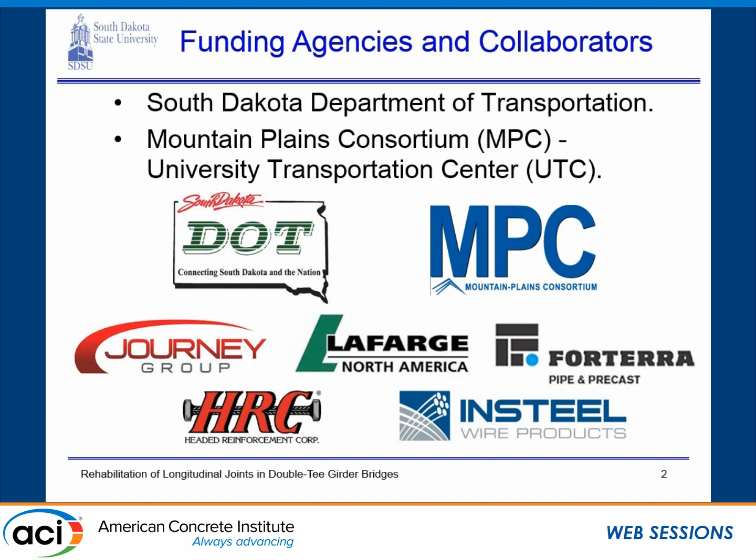Another good news that I have for you, I'm the first person in the seismic presentation who is not going to show you anything regarding seismic. But this is one of the issues that you would see in many of the bridges.

I'm going to talk about double T bridges and how we are going to retrofit the longitudinal joints of 2 precast girders. Just to give you an introduction, double T bridge, we can see the section down there - here is around 4 feet wide and 2 feet deep.

The way that they're constructed is they just put them side by side. There are steel angles every 5 feet along the length of the girders, and on field they just weld another small plate to the existing angles, and they fill the key with the grout. That's essentially how a precast pre-tension double T bridge is constructed.

That's fairly common in South Dakota on the local roads. We have more than 700 of those. And I know that many of the neighboring states have this kind of bridge. In parking buildings, you can see also this kind of girders. And I know that Texas and Alaska also use this.

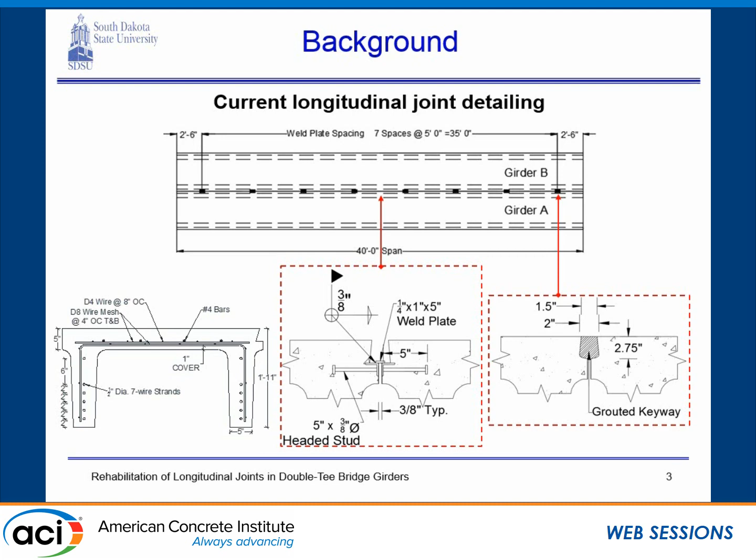So the issue that I'm going to raise today, and hopefully to give you some answers, is not just for South Dakota, you would see in many other states. The issue is both structural performance and durability and serviceability.

After 5 to 10 years of service on the field, what happens is the joint deteriorates, because of the salt used for the snow, and the deterioration of this joint is faster than what you would see, let's say, in California. Basically, after 40 years of service, DOT ends up replacing these girders while they should last at least 75 years. So that's not the case. That's actually the durability issue.

Dr. Wehbe, who was the co-PI of this project, also did a full-scale test of this bridge, 40 feet long, 2 of the girders side by side. He used the conventional detailing that I showed you, and he tested the girders to failure. You can see that the bridge unzipped, and essentially you have 2 girders that don't talk to each other, don't transfer loads. So they can meet AASHTO service limit state, but they cannot meet AASHTO strength limit state. So absolutely this design, this joint, after 20, 30 years would make your design unsafe.

So essentially one of the girders is taking the full load of the truck rather than distributing it.

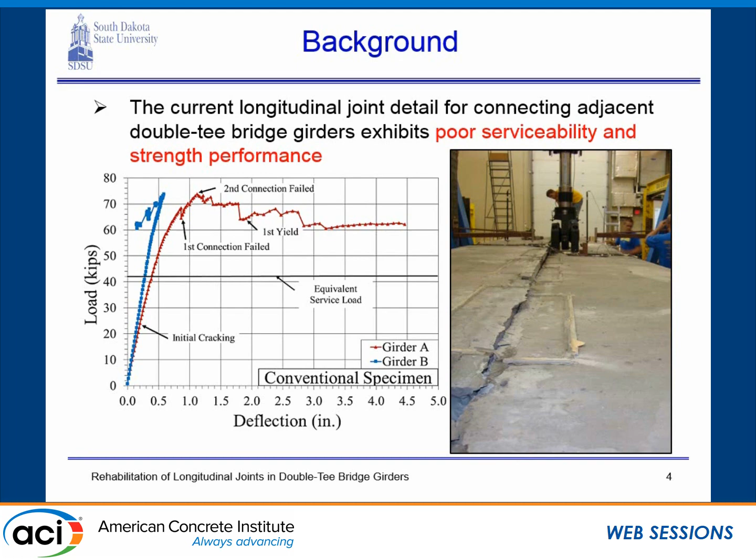So my job here is to show you the technique that we came up with to repair it, the retrofit, and hopefully to extend the life of the bridge for another 75 years rather than replacing them. To be able to do that, I need to introduce latex modified concrete. I don't have any specific slide for that, but I do have one for ultra high performance concrete, which is kind of a hot topic right now.

Here is essentially what UHPC is. It's a cementitious material with very fine aggregate. They make old sands and gravel the size of dust and mix them up to make a honey-like material they pour, and that's UHPC.

2% steel fibers is usually used, and in the lab, the strength can get to 36,000 psi. When you hit it with a hammer, you can hear the sound of steel while it's concrete. On field, you can easily get to 18,000 psi.

Here is a stress-strain diagram of concrete in compression, and that's UHPC: 5 times stronger, 5 times more ductile without any reinforcement, and the tensile property is much better than conventional concrete.

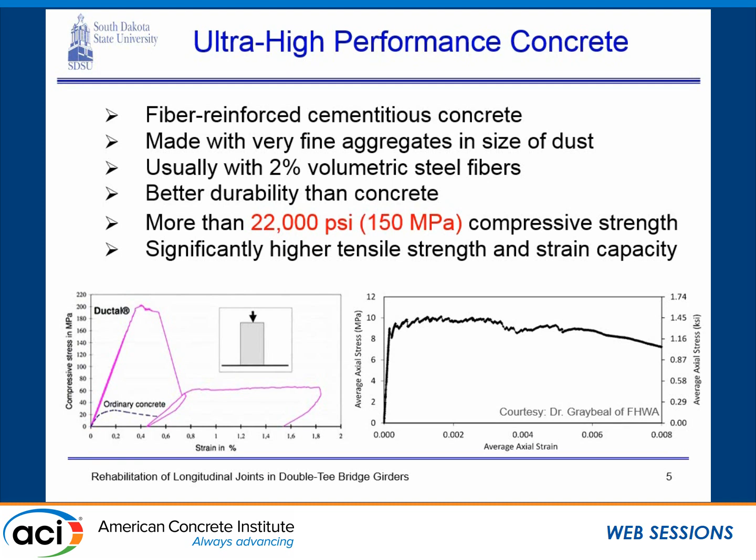So this is one of the materials we use in this study. What we essentially did was an extensive literature review. We came up with 20 joint rehabilitation detailings, then we came up with a rating system. The rating system told us that 4 of those options would be the best for rehabilitation of this kind of bridge.

We did 13 larger scale beam tests to optimize our detailing. We also did finite element analysis to come up with the smallest possible sizes of the repair. Then we tested one full-scale bridge for around 50 years of service life. We basically massaged the bridge and saw some preliminary damage.

Then we did the rehabilitation. We tested the bridge for fatigue and ultimate testing. Because of the interest of time, I'll only show you the result of rehabilitation, how we did the rehabilitation, how the result was, and at the end, the recommendations that we made.

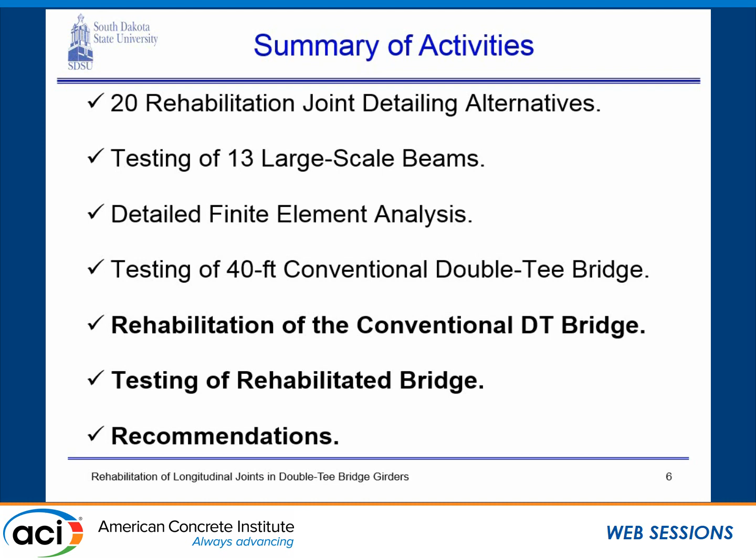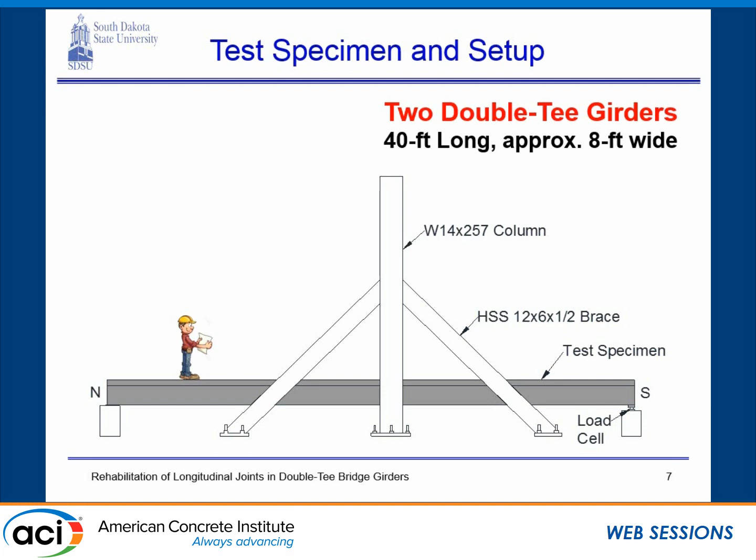We tested a full-scale 40 foot long bridge. The way we built it, we asked a contractor, Forterra, down in Mitchell, South Dakota, to build these 2 girders. We put them side by side, and followed exact detailing that has been used on the field.

We asked a licensed welder to come and do all the steel welding for us. We tried to be as realistic as possible to what would be used on field. We started testing this bridge, massaging it for maybe 40 to 70 years of service life, and then performed rehabilitation. We didn't want to rehabilitate a new bridge, so let's put it that way.

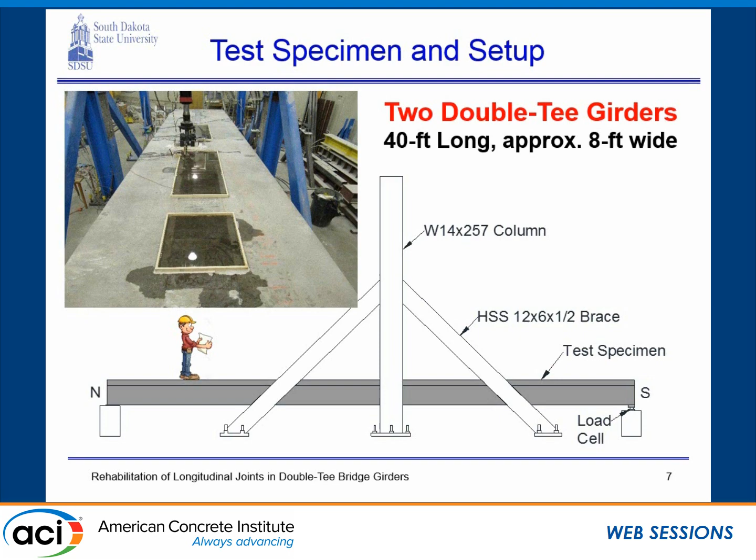We had all kinds of sensors in it. When you stay here, that's what you would see on the bridge, and you can assume that would be me. So that's the geometry of the bridge.

We did 5 tests. We started with testing the conventional bridge, then tested it up to the service limit just to crack the longitudinal joint, and then rehabilitated it, testing under AASHTO fatigue 2 loading for 500,000 cycles, and AASHTO fatigue 1, which is not really the case here.

This bridge is going to be used on local roads, so fatigue 1 really doesn't apply there—that's for high traffic volume areas. But we did it just to make sure the bridge is strong enough with the rehabilitation, and we did ultimate testing as well.

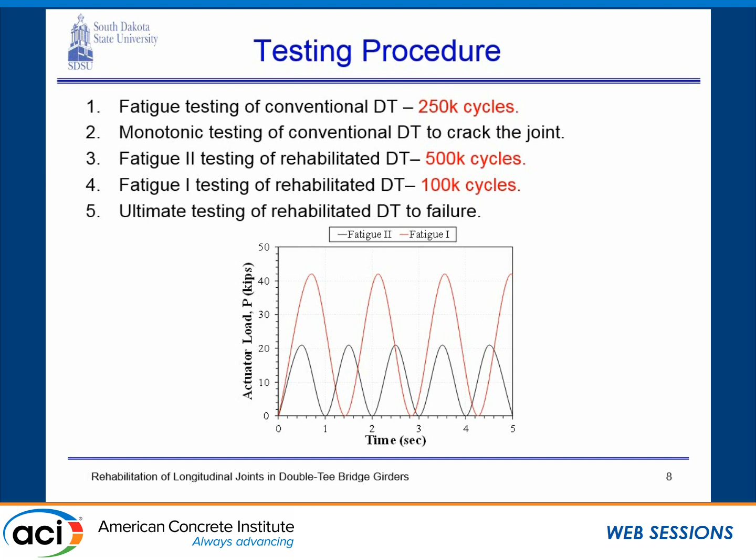The bridge was heavily instrumented with different kinds of instruments: strain gauges, LVDTs, and load cells. To give you a general idea, out of those 5 element tests and 13 beam column tests we did, we came up with 2 rehabilitation methods.

Rather than testing 2 full-scale bridges, we came up with testing 1 full-scale bridge, but using those 2 methods on half of the bridge each. On this half of the bridge, I'm going to call it a continuous joint.

We poured latex modified concrete, and all our previous studies were essentially saying that the durability of this material is good, so that's why we used it instead of conventional grout. On this portion of the bridge, we came up with this pocket idea to reduce material and cost, using ultra high performance concrete, or UHPC, in this one. So this one I'm going to call the pocket connection, and that one is the continuous one.

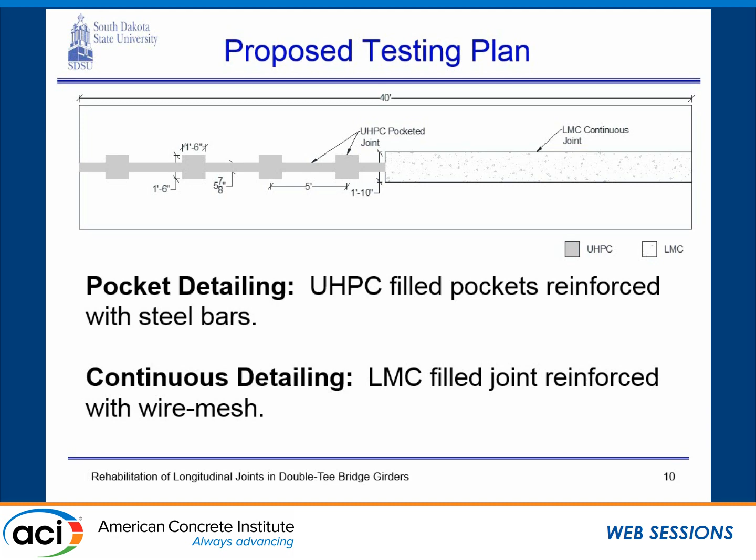The way we performed the rehabilitation after testing the full-scale bridge was we asked a licensed contractor to come to our lab and make those shapes that I just showed. Essentially, they cut 1 inch deep and then demoed the concrete.

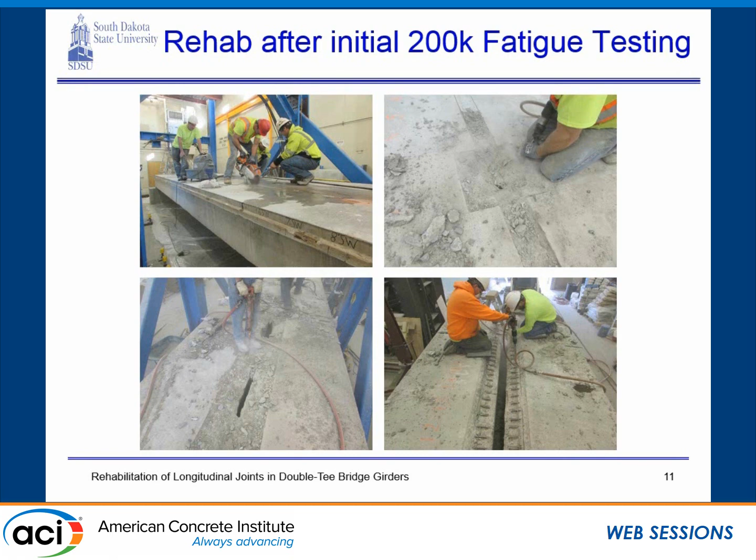The goal was to use exposed bars of the deck in either case and add some reinforcement to make sure we tied the two girders together. All of those previous studies were to optimize the size of the joint, the spacing, which was 5 feet, and the size, 18 by 18, or 22 inches here, continuous one.

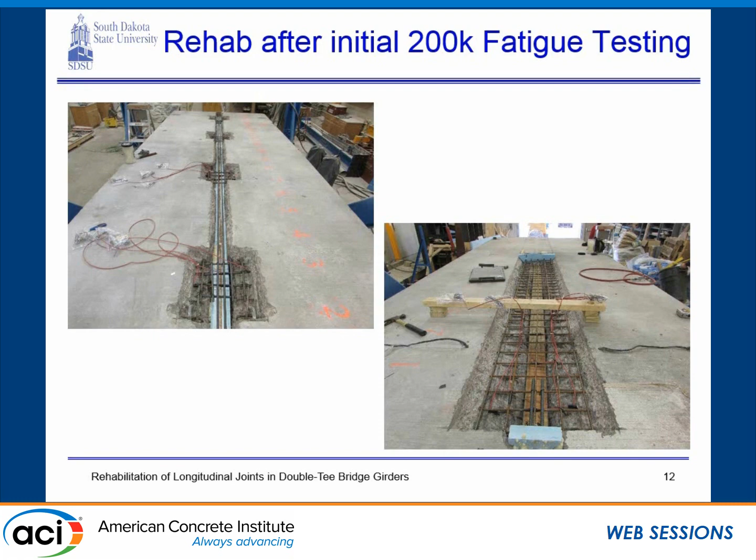So this side we filled with latex modified concrete, and this half of the bridge we filled with ultra high performance concrete. Here we can see how we poured the latex and UHPC on field. That was essentially very easy.

The only issue with UHPC, at least for us, is we didn't have a large volume shear mixer. That was an issue for us, but on field they can go with huge capacity, large capacity shear mixer. That would be the only issue because it needs 20 minutes of mixing, and a more powerful machine would give you that option.

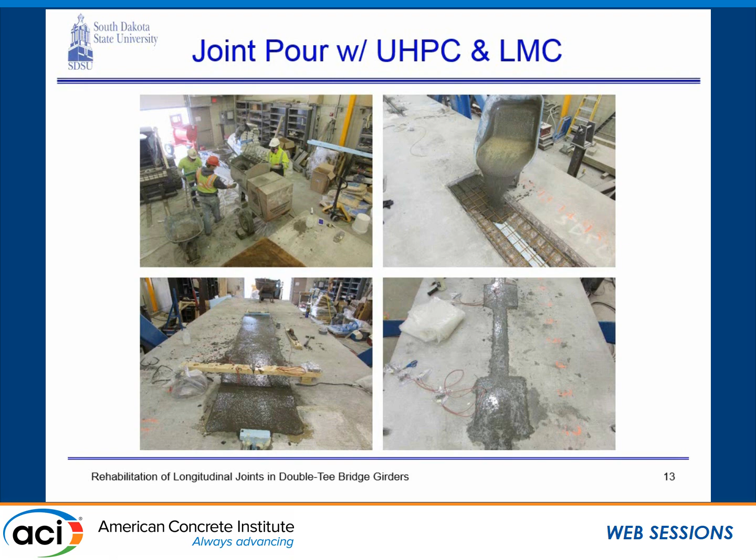Before we did any testing, we saw shrinkage cracking on the latex modified side. Let me zoom in - that was one of the girders, that's another girder, that's the continuous joint we filled with latex modified concrete. And that's just before doing any testing - we saw this parallel, shrinkage-like cracking.

Just by seeing this, our recommendation is don't use latex modified concrete or any kind of conventional grout here, because of the boundary condition you would see a shrinkage crack. They call that a restrained shrinkage crack. So that was a hard way to learn - don't use that material.

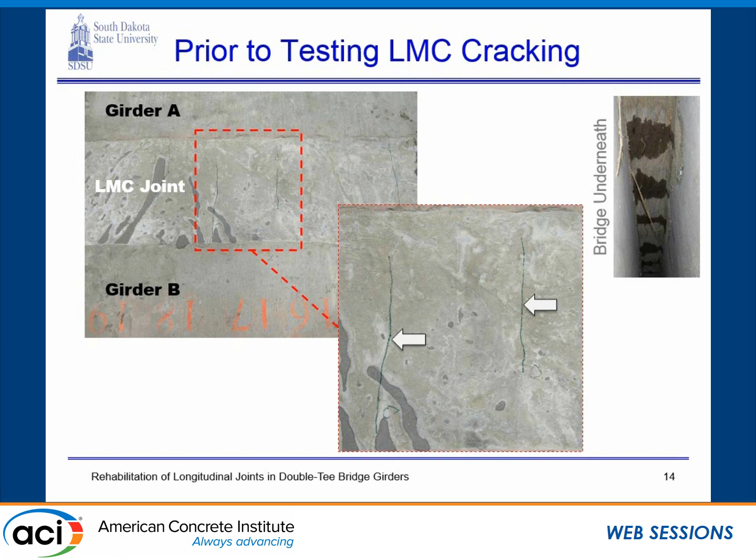But anyway, we decided to continue the testing. This is a picture of the bridge underneath. We had water dams on top of the bridge on every one of these joints, so you can see the water leak - it was pretty bad. If you want to use it in a cold region, this would deteriorate very fast. So it's really not an option for cold areas - our recommendation is don't use it.

This is the way we did our fatigue testing. This one is AASHTO fatigue 2. We apply 21,000 pounds every second.

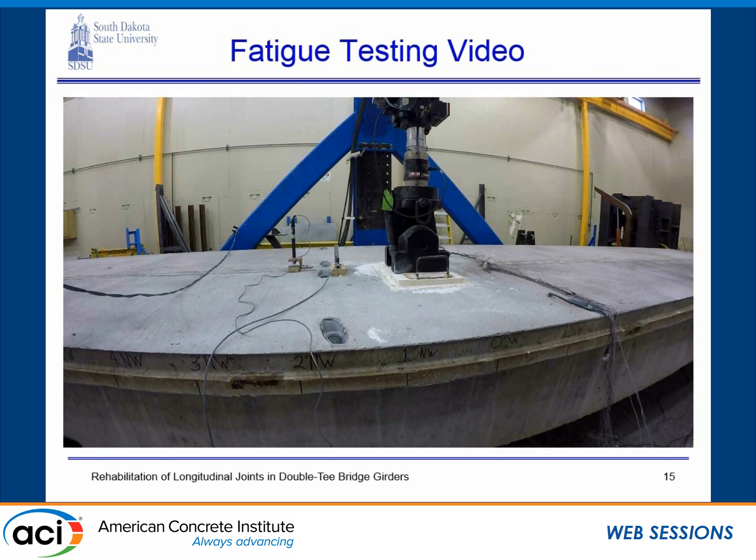Here is the result of both phases of the fatigue testing. This is AASHTO fatigue 2, which is for local load essentially. For 500,000 cycles, based on an average daily truck traffic (ADTT) of 15 - which is actually a good number for South Dakota local roads - it's equivalent to 97 years of service life. For 97 years of service life, the stiffness of the bridge didn't deteriorate at all, and it actually gained some stiffness. It could just be a measurement issue, but you can see there was no change in the stiffness. So we can say that, at least from a service life standpoint, it's good.

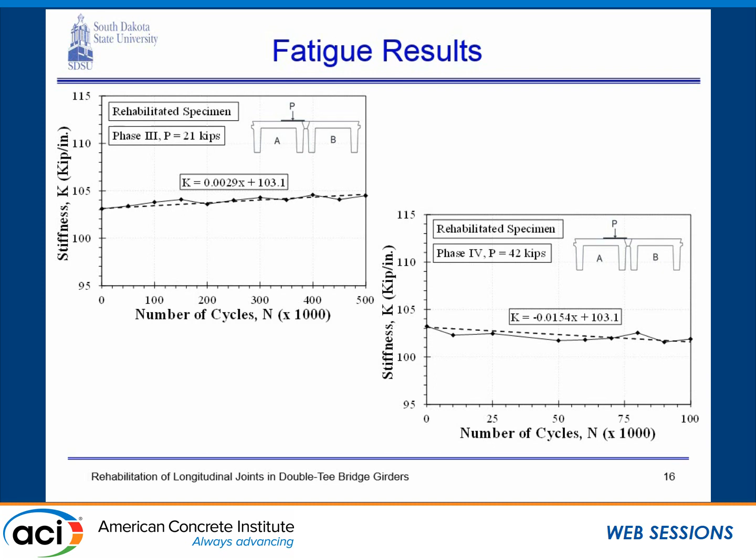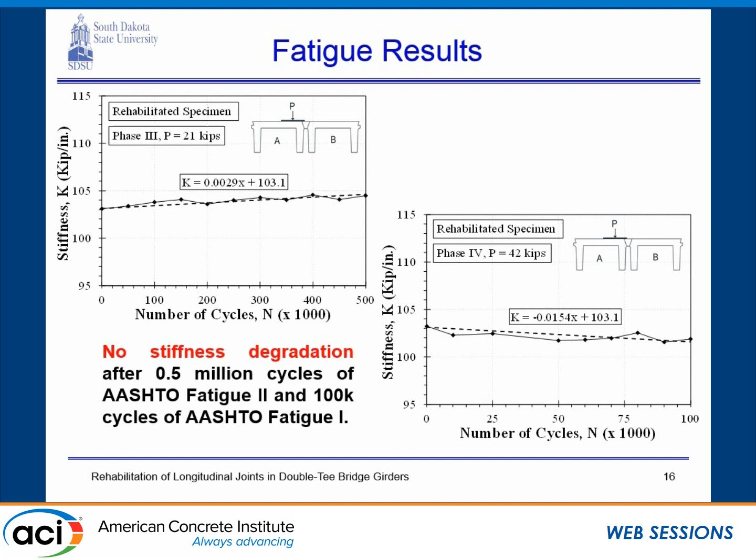We also did AASHTO fatigue 1 testing, which is essentially double the force we applied in fatigue 2. This is for high traffic areas, and again we didn't see any significant change in stiffness. So our conclusion was, even though there was shrinkage cracking on half of the bridge, overall there was no change in stiffness - those shrinkage cracks don't affect structural performance. Combining both tests, we tested the bridge for more than 100 years of service life, and there was no change in the stiffness of the bridge.

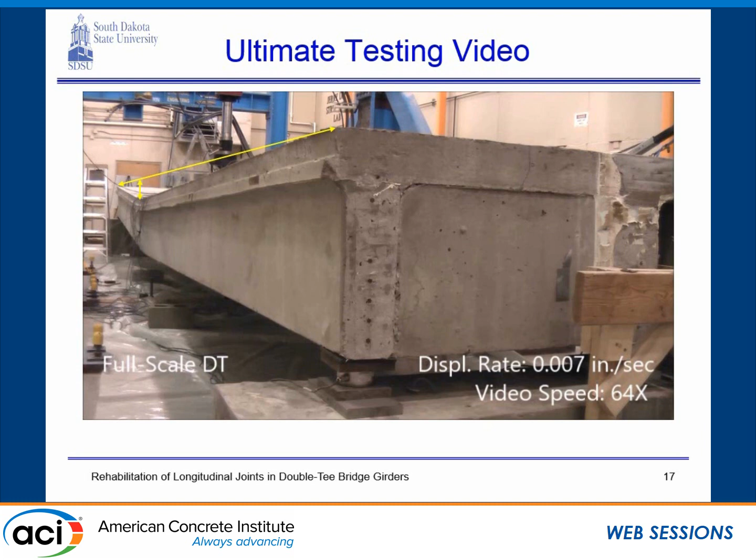Then we performed the ultimate testing. Our speed was very low, and I have these arrows for you to see how ductile the bridge was. The speed of testing was 0.007 inches per second, so we did this testing over about 4 hours. You're seeing that in 30 seconds - the speed of the video is actually 64x. You can see the bridge bending here, and it essentially failed in a very ductile manner.

I'll give you the specification for that. Another thing I wanted to mention is that for both fatigue and ultimate testing, rather than putting the load exactly at the centerline of the bridge, we offset the load and put it on one of the girders. The goal was to see if the joint would survive this extreme condition and be strong enough to take the load from one girder and pass it to another. So the load was offset.

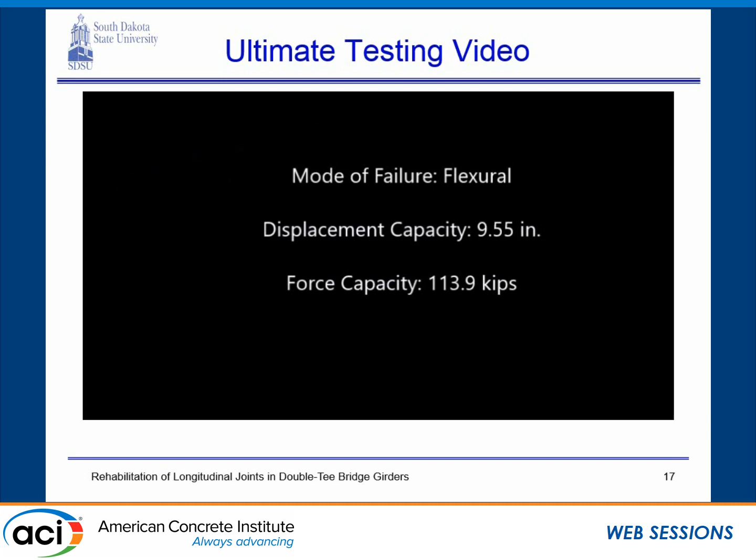Here is the damage of the bridge during ultimate testing. At the beginning we had very typical damage - the crack started at the middle of the girder, very close under the applied load, and then the crack propagated and got bigger. At the end, the girder failed, or the bridge failed, by compression failure of the deck itself.

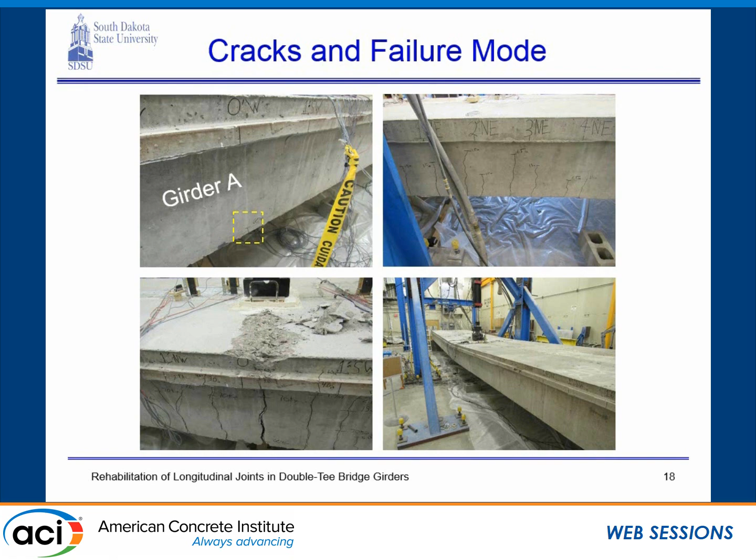You can see the condition of the bridge after the failure. Here is the damage of the two joints, the two rehabilitation methods that we had. That one is the UHPC.

At the failure of the girder, we had minor cracks at the edge of the pocket. Here is the damage of the continuous joint. At the failure of the girder, we had insignificant damage of the joint. By taking a look at this, you can tell the joint, the rehabilitation method was strong enough to take the loads, sustain all of the deformation, and cause girder failure. So it was sufficient to do that.

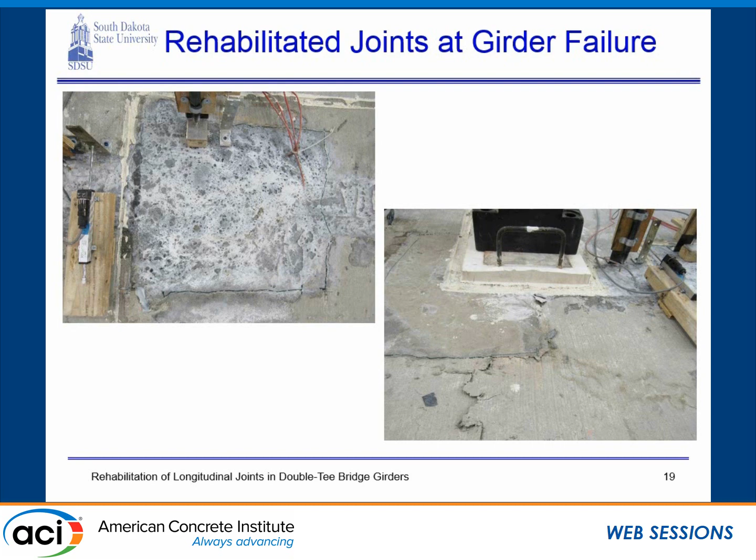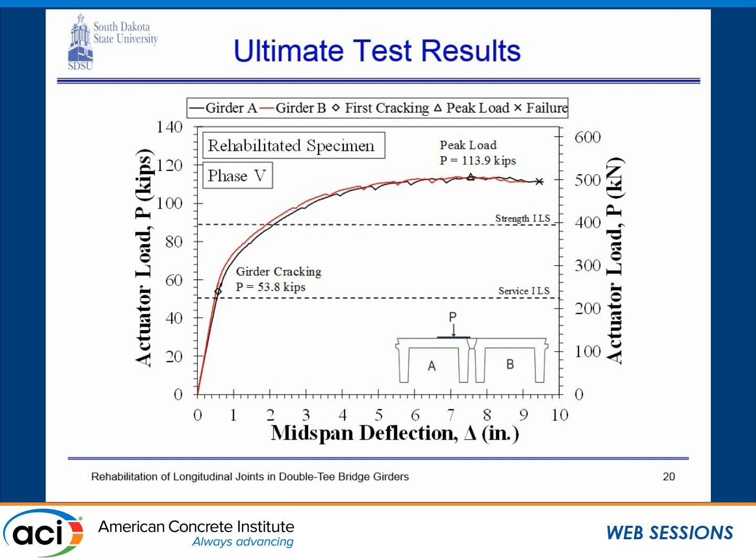Here is force deformation of each girder. You can see up to the failure, both girders perform monolithically. Put it in a simple way, it's like you cast both at the same time. So both girders perform the same up to failure, and there was no change in force deformation behavior of the two girders that we connected through these two methods.

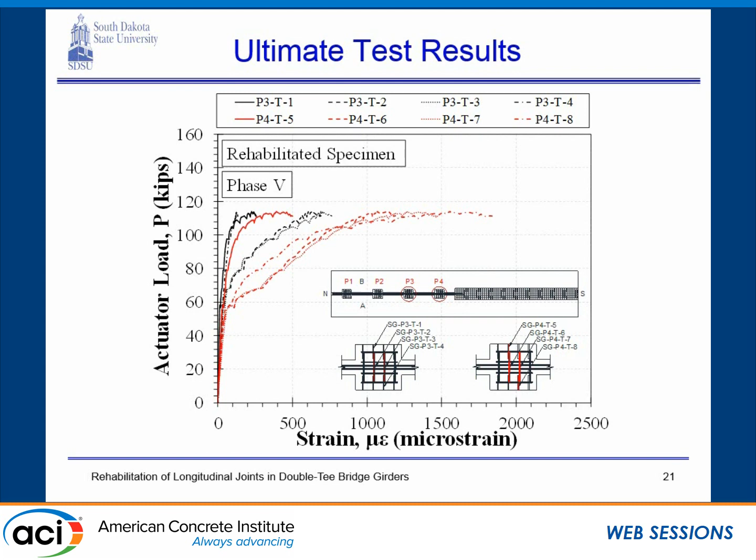We also had strain gauges inside the joints. At the failure of the girders, at the failure of the bridge, the strain of reinforcement inside the pocket was less than yielding, meaning that we met the capacity protected requirements of the AASHTO at the failure of the girder. That was fine as well.

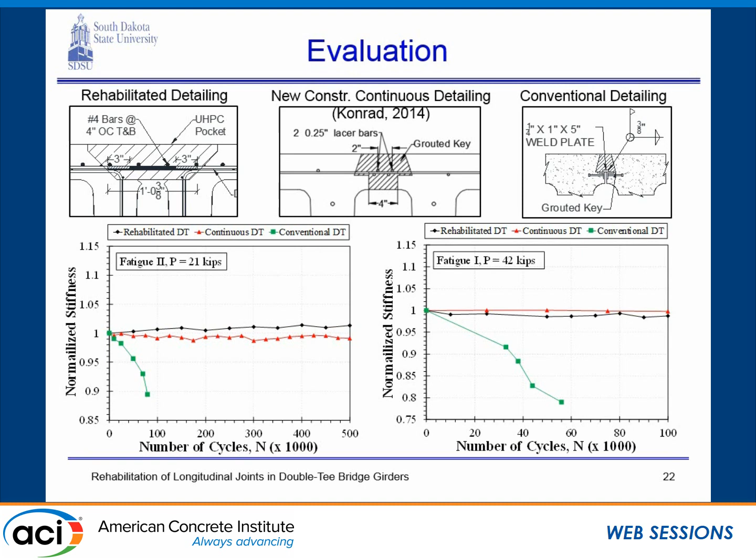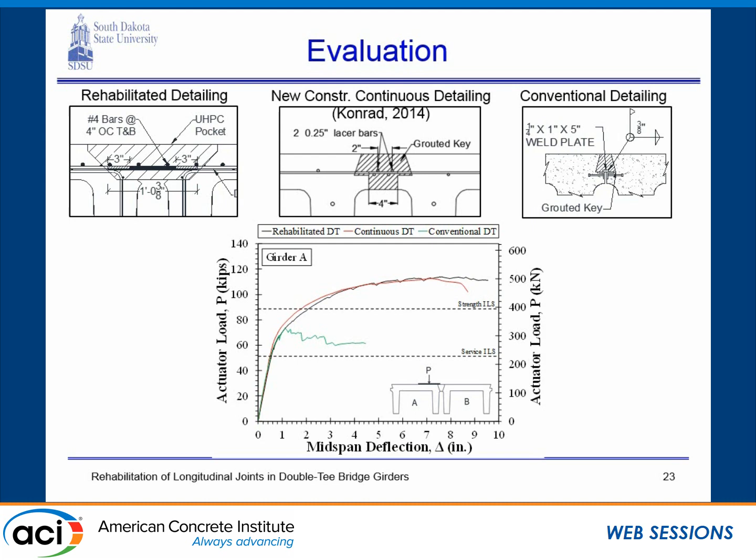Here's force deformation, same color scheme. This is the conventional double T - it didn't meet the AASHTO strength limit requirement because it failed here, while the new joint detailing and the rehabilitated one failed in the same ductile manner and met all of the requirements of AASHTO. This means that both rehabilitation detailings are structurally viable.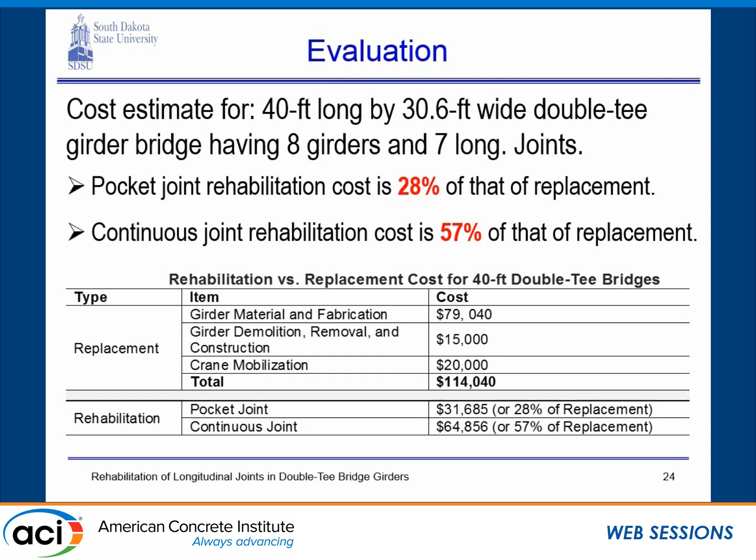We also did a cost estimate - we asked a contractor to do this cost estimate. With the pocket idea, the cost of rehabilitation is only 30% of the bridge replacement cost. With the continuous one, your cost would be about half of that. So regardless of which method you pick, you're going to save lots of money. We asked the contractor which they would prefer on field - pocket or continuous - and they said pocket, because it was much easier for them to form those joints rather than make it continuous. In terms of structural performance, it was better or acceptable in both cases. In terms of cost, pocket would save you 70% with respect to replacement.

So as a conclusion, I would say that both pocket and continuous detailings are viable, but you cannot use non-shrink grout or SCC concrete in the joint - you have to use a better material like UHPC. The pocket idea with UHPC works just fine. You can save money by using smaller joints and still get very good structural performance. So our recommendation is to go with the pocket idea, because it's structurally viable and reasonable.